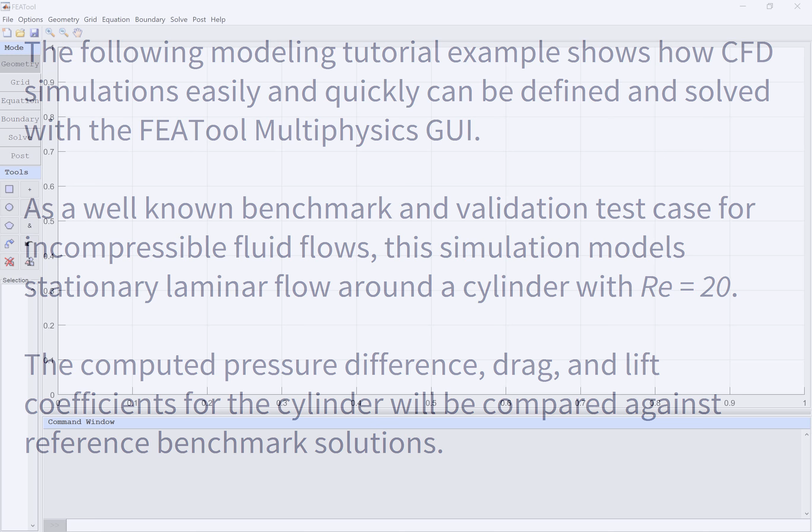Click on the New Model button in the upper horizontal toolbar, or select New from the File menu, to clear all previous data and start defining a new model. In the New Model dialog box, click on the 2D radio button in the Space Dimensions frame, and choose Navier-Stokes equations from the Physics drop-down list. Leave the space dimension and dependent variable names to their default values. Finish and close the dialog box by clicking OK.

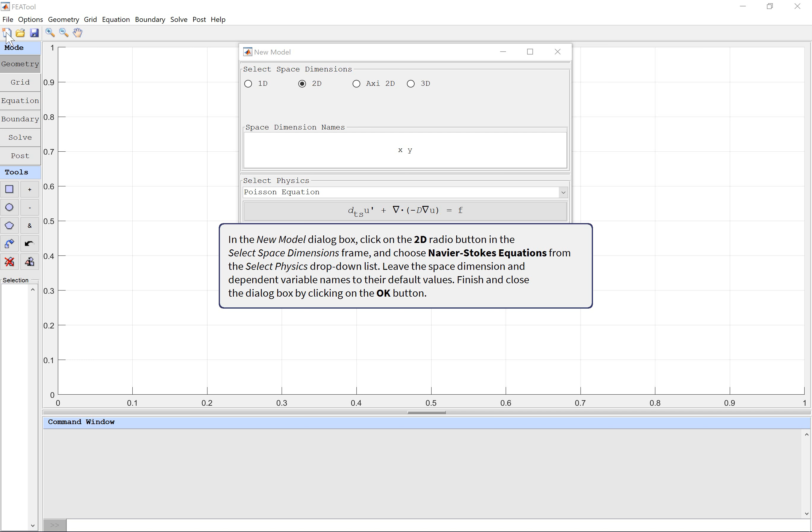Geometry definition.

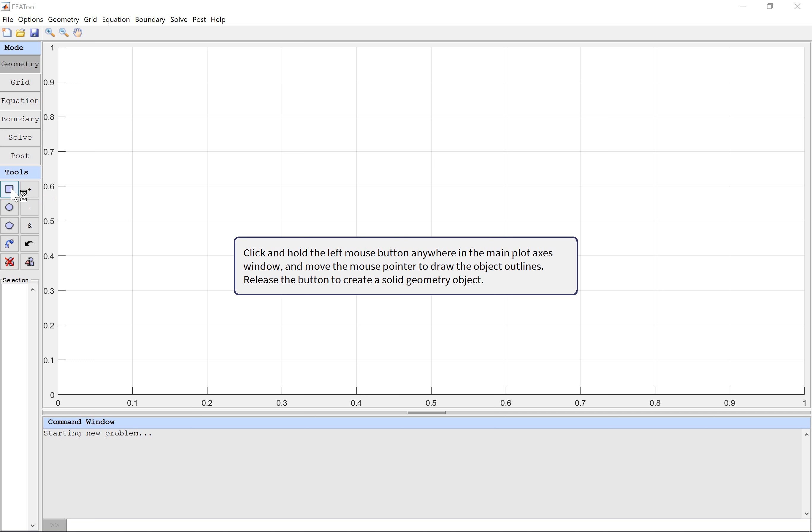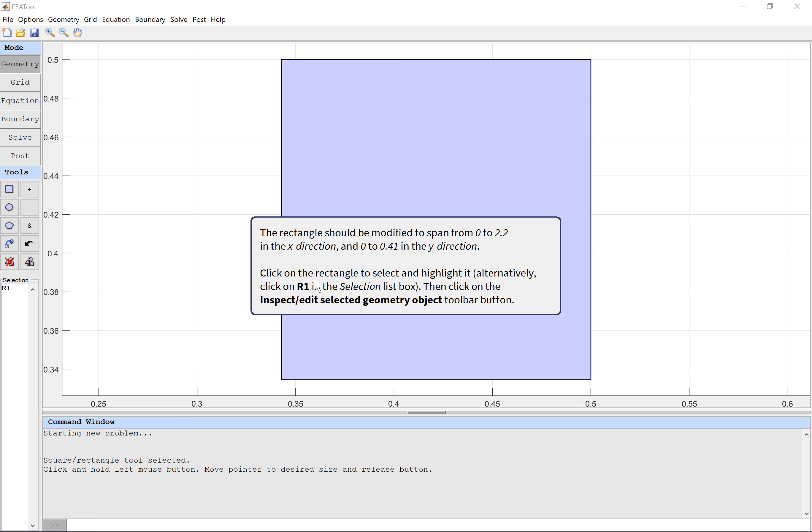To create a rectangle, first left-click on the Create Square button in the left-hand side toolbar frame. Click and hold the left mouse button anywhere in the main plot axes window, and move the mouse pointer to draw the object outlines. Release the button to create a solid geometry object. The rectangle should be modified to span from 0 to 2.2 in the x direction, and 0 to 0.41 in the y direction. Click on the rectangle to select and highlight it, or alternatively click on R1 in the selection list box. Then click on the Inspect Geometry Object toolbar button. In the Edit Geometry Object dialog box, change the min and max coordinates to 0, 2.2, 0, and 0.41, respectively.

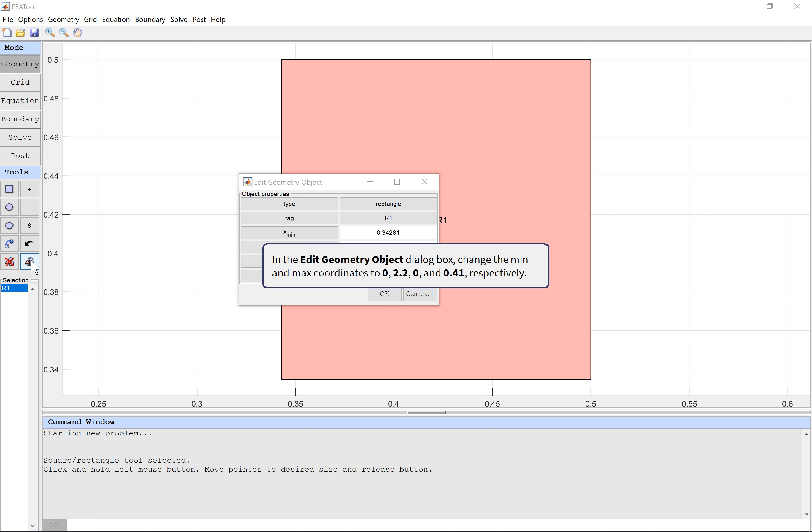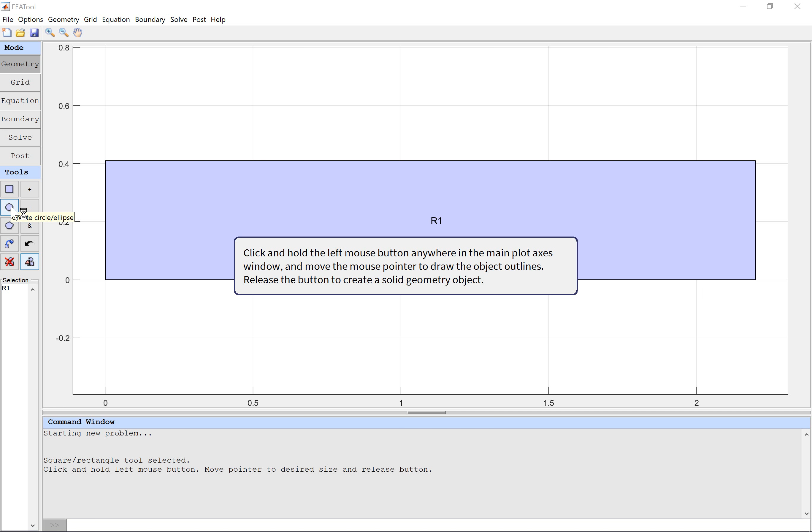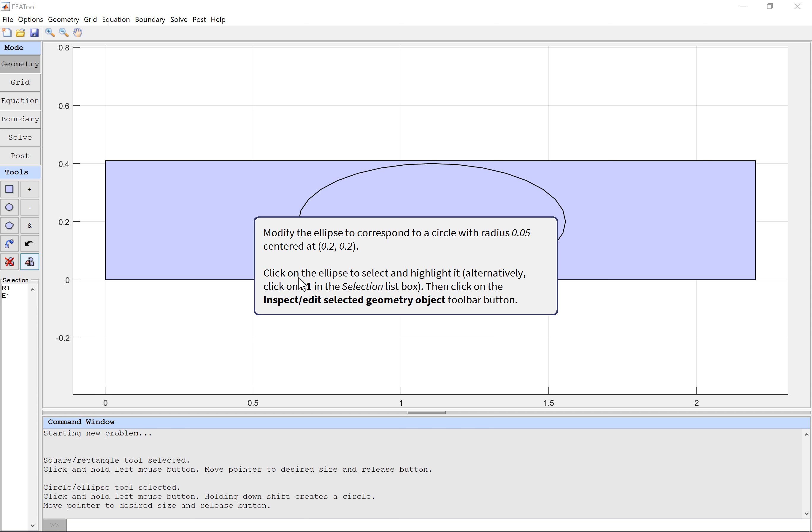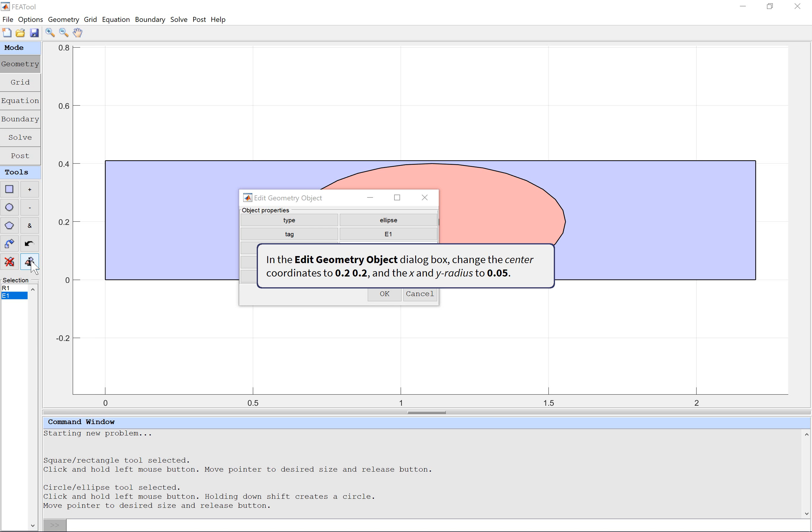To create a circle, first left-click on the Create Circle button in the left-hand side toolbar frame. Click and hold the left mouse button anywhere in the main plot axes window, and move the mouse pointer to draw the object outlines. Release the button to create a solid geometry object. Modify the ellipse to correspond to a circle with radius 0.05, centered at 0.2, 0.2. Click on the ellipse to select and highlight it, or alternatively click on E1 in the selection list box. Then click on the Inspect Geometry Object toolbar button. In the Edit Geometry Object dialog box, change the center coordinates to 0.2, 0.2, and the x and y radius to 0.05.

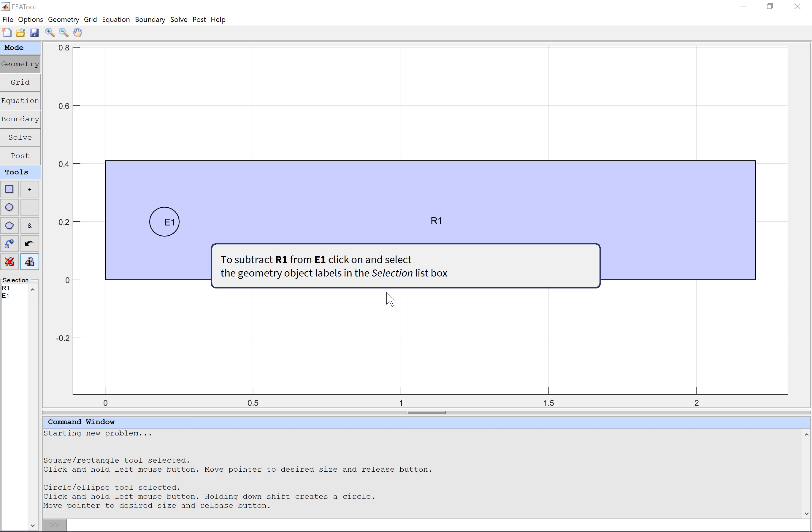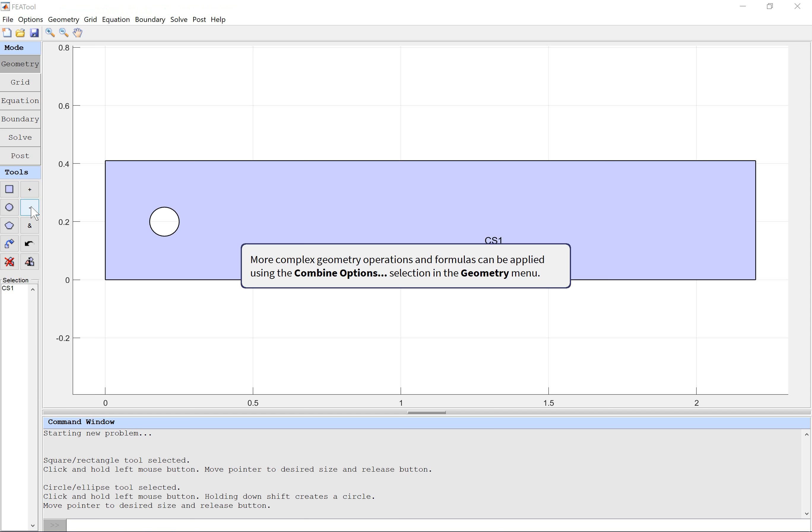To subtract R1 from E1, click on and select the Geometry Object labels in the selection list box. Click on the Subtract Geometry Objects button to subtract the smaller from the larger object. More complex geometry operations and formulas can be applied using the Combine Options selection in the Geometry menu.

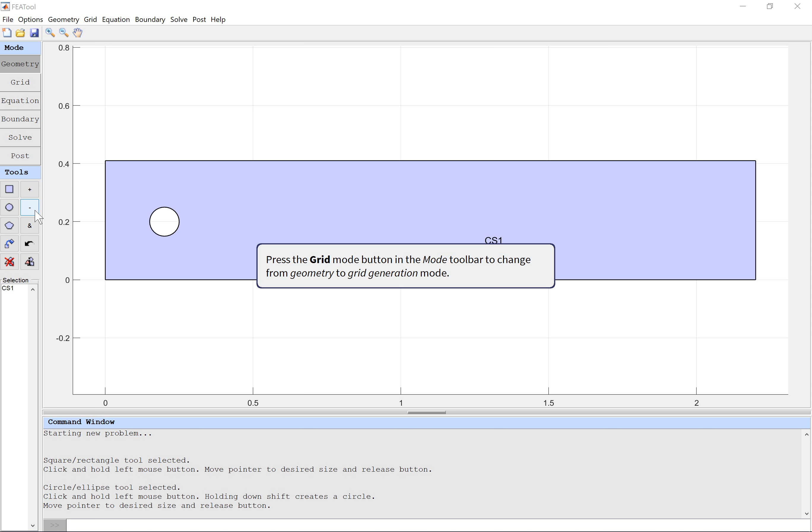Press the Grid Mode button in the Mode toolbar to change from Geometry to Grid Generation mode. Set the target grid size by entering 0.02 in the Grid Size Edit field above the Grid toolbar buttons, or alternatively use the slider control. Then click on the Generate Grid button to call the automatic grid generation function.

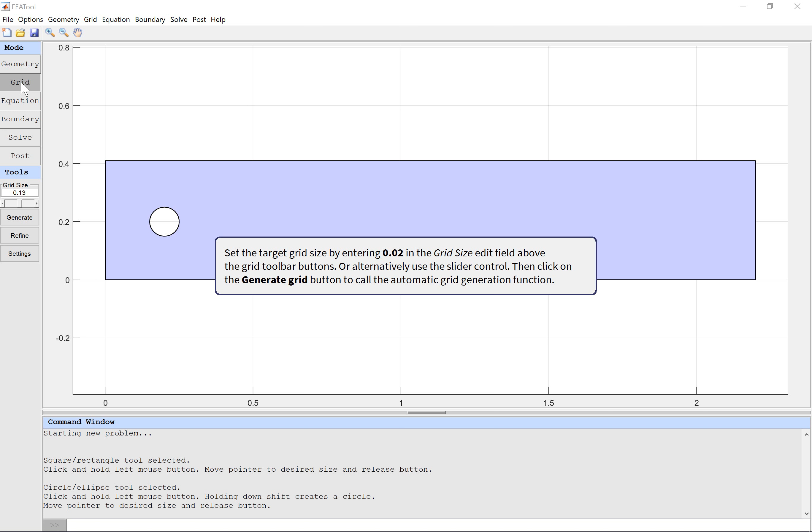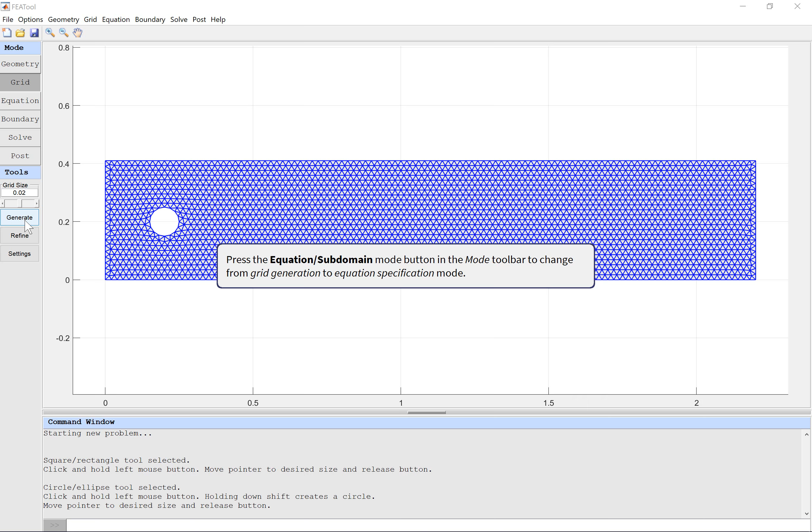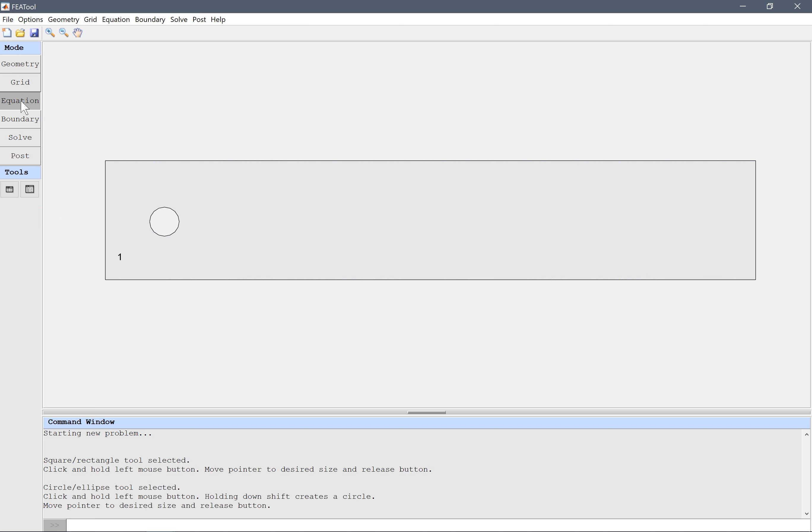Press the Equation Mode button in the Mode toolbar to change from Grid Generation to Equation Specification mode. In the Equation Settings dialog box, set the density to 1, and viscosity to 0.001. Press OK to finish and close the dialog box.

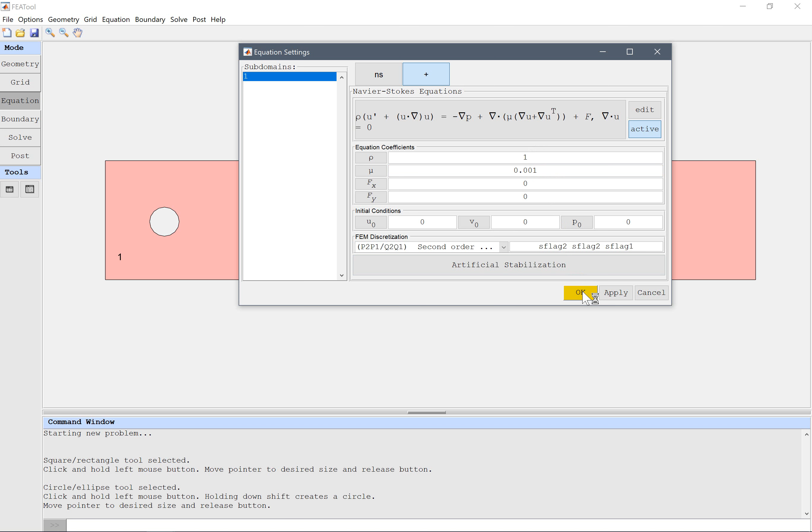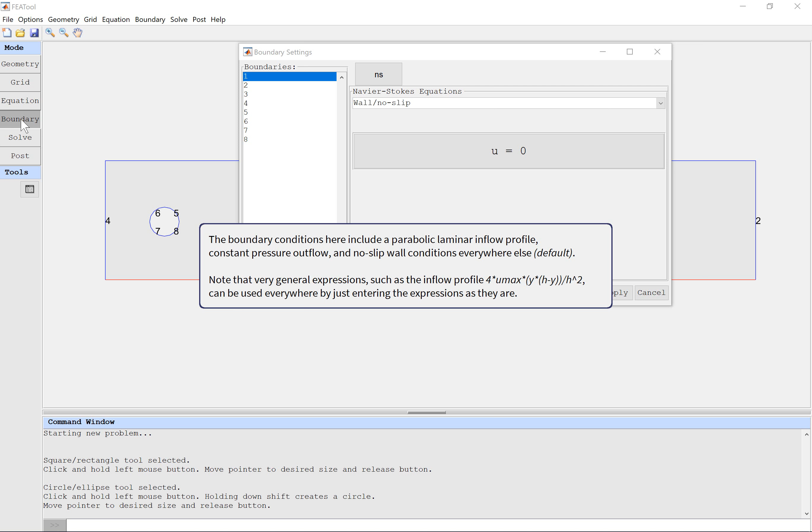Press the Boundary Mode button in the Mode toolbar to change from Equation Specification to Boundary Settings mode. The boundary conditions here include a parabolic laminar inflow profile, constant pressure outflow, and no-slip wall conditions everywhere else. Note that very general expressions, such as the inflow profile, can be used everywhere by just entering the expressions as they are. In the Boundary Settings dialog box, select the outflow pressure boundary condition for boundary 2, and assign the boundary coefficient value 0.

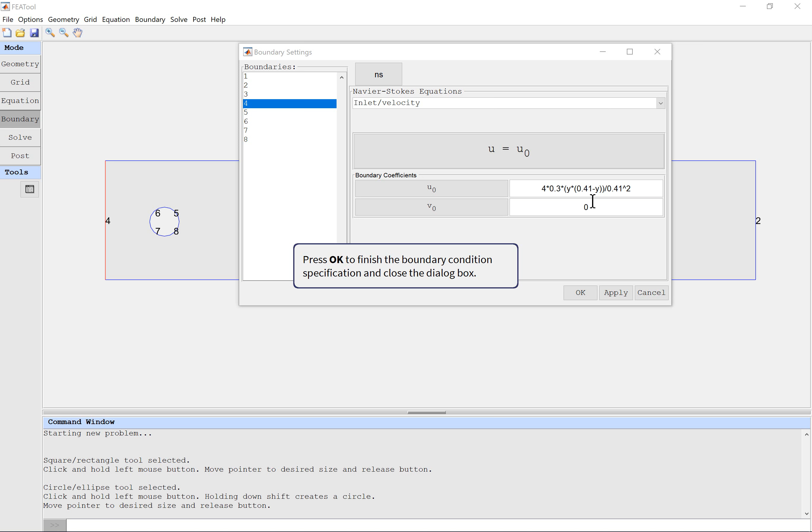Select the inlet velocity boundary condition for boundary 4, and assign the following boundary coefficient values. Press OK to finish the boundary condition specification, and close the dialog box.

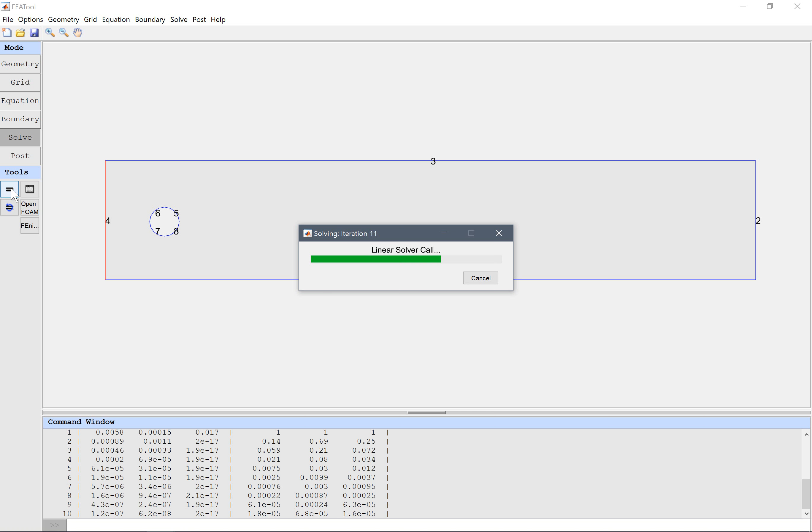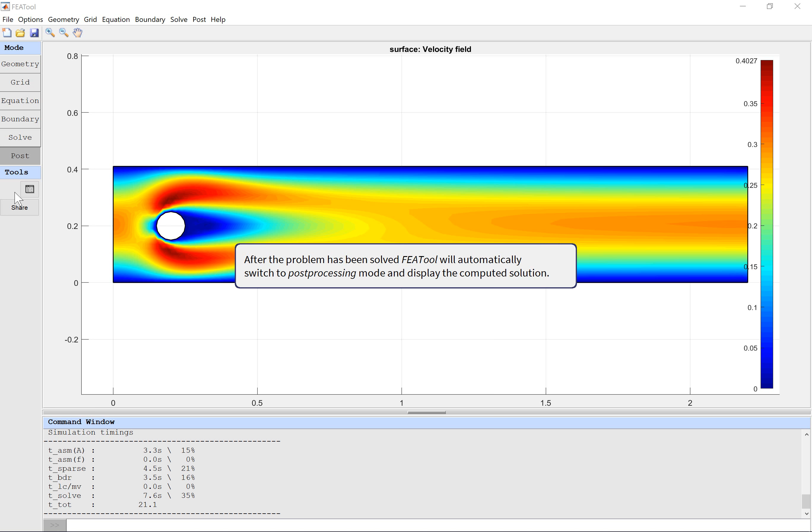After the problem has been solved, FEATool will automatically switch to post-processing mode, and display the computed solution. Click on the Post-Processing Settings toolbar button to open the corresponding dialog box. Activate the contour and arrow plot options by marking the corresponding checkboxes.

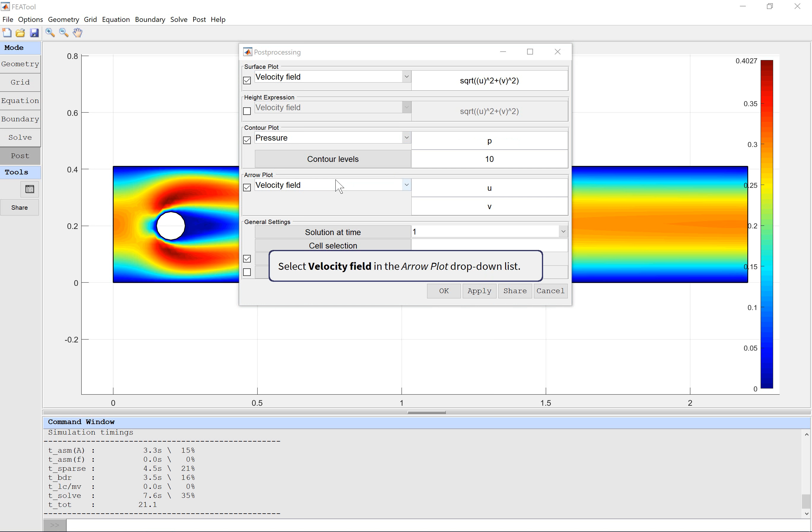Select Velocity field in the Surface Plot drop-down list. Select Pressure in the Contour Plot drop-down list. Select Velocity field in the Arrow Plot drop-down list. Press OK to plot the selected post-processing expressions.

The solution will be visualized as surface, contour, and arrow plots in the main plot axis window. From the visualization of the flow field, one can see that a recirculation zone is formed behind the cylinder, and that the flow returns to a steady laminar parabolic profile downstream.

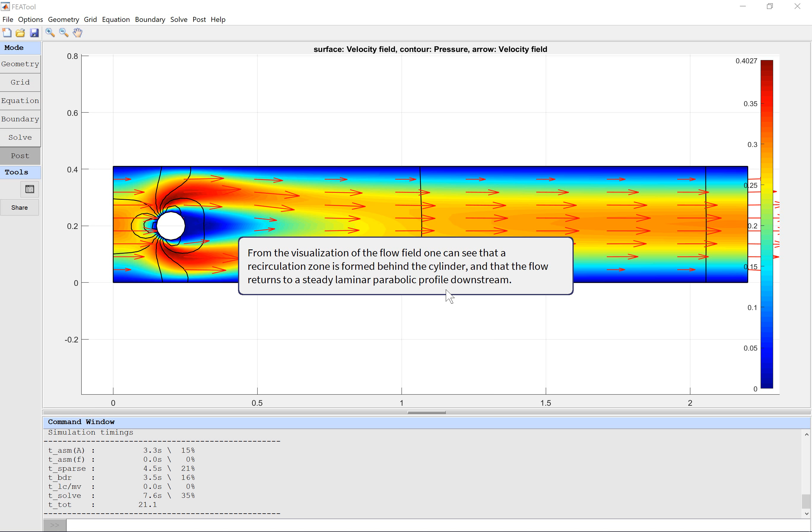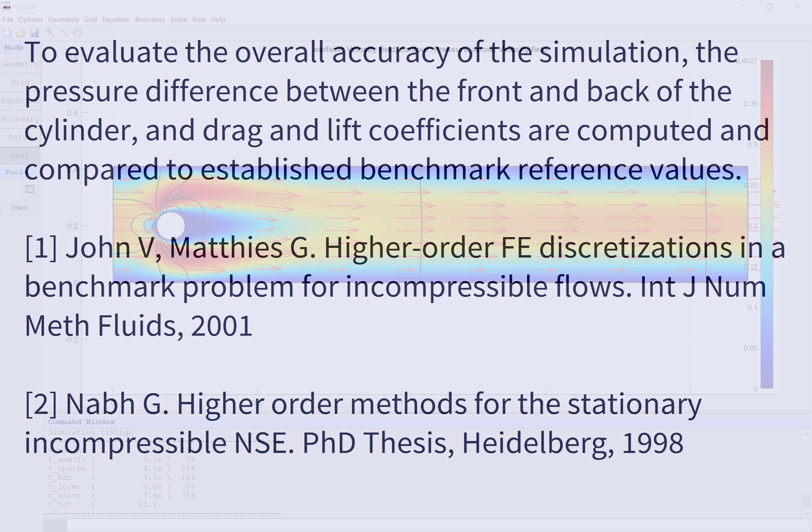To evaluate the overall accuracy of the simulation, the pressure difference between the front and back of the cylinder, and drag and lift coefficients are computed, and compared to established benchmark reference values.

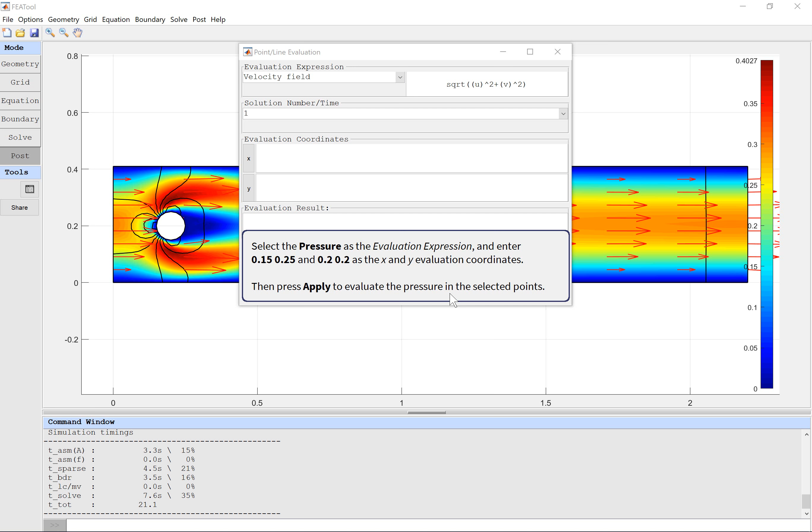To compute the pressure difference, select Point Line Evaluation from the Post menu. Select the pressure as the evaluation expression, and enter the following X and Y evaluation coordinates. Then press Apply to evaluate the pressure in the selected points.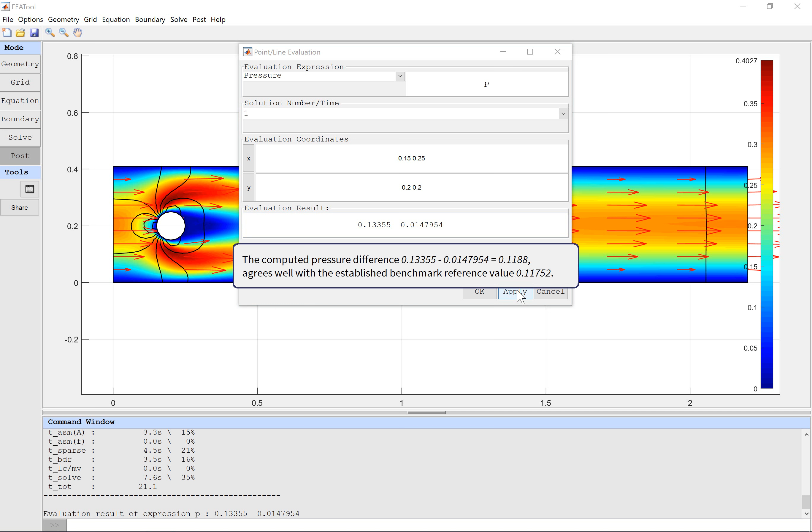The computed pressure difference agrees well with the established benchmark reference value.

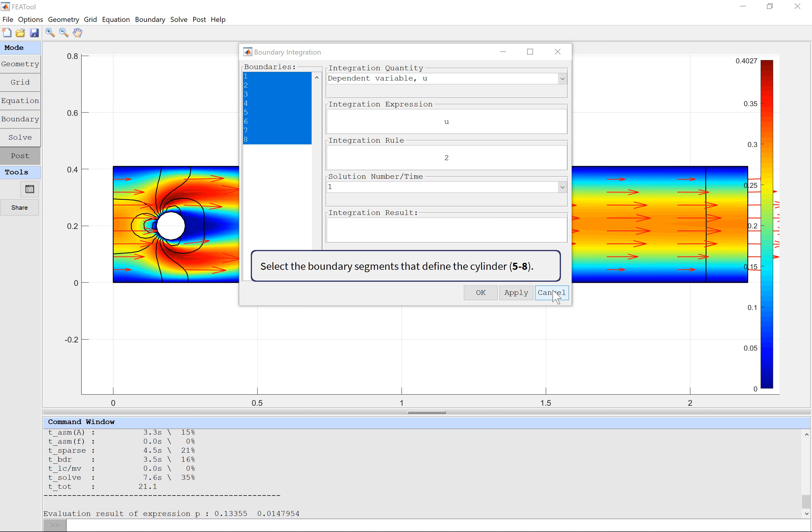To compute the drag and lift coefficients, select Boundary Integration from the Post menu. Select the boundary segments that define the cylinder. Enter the expression for the drag force into the Integration Expression Edit field, and press Apply to compute the result.

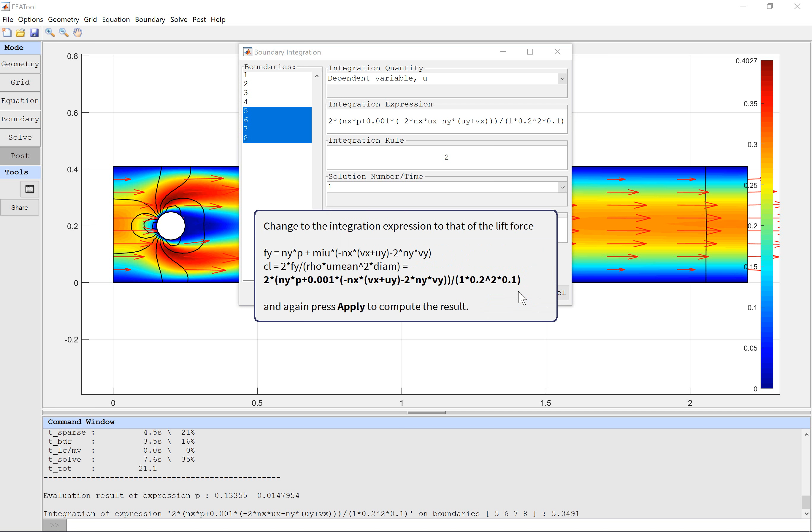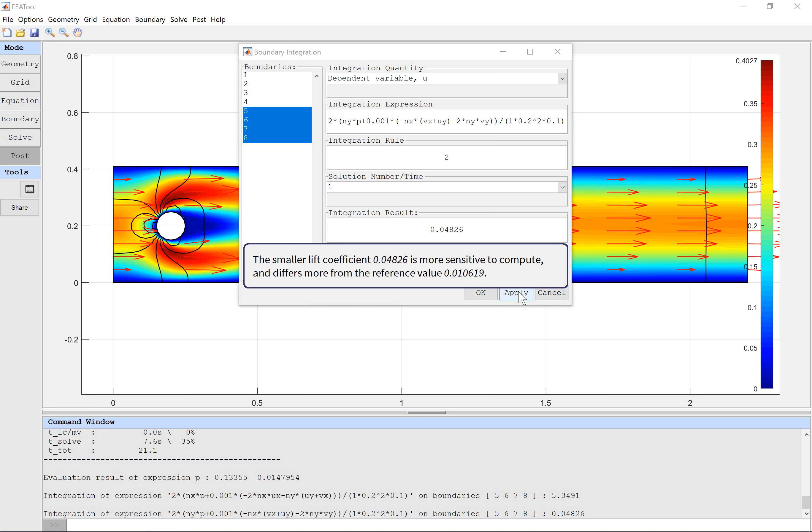The computed drag coefficient is in the same range as the established benchmark reference value. Change the integration expression to that of the lift force, and again press Apply to compute the result. The smaller lift coefficient is more sensitive to compute, and differs more from the reference value.

To further reduce the error, one can recompute the problem with a finer grid, or increase the solution space approximation by using higher order finite element shape functions.